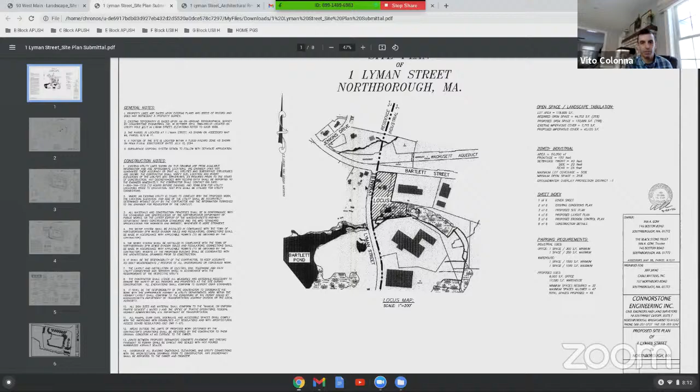Okay, so the site's 1 Lyman Street. We're on the corner of Lyman and Bartlett, right here. I'm sure most of you probably know the site, are familiar with it. Right now, there's a single-family house on it. Go down to the existing and proposed plan here. So there's an existing single-family house right in the middle of the site. This is Bartlett. There's Lyman on the side.

The overall parcel itself is 4 acres. It consists of a few separate smaller parcels, but combined it's overall 4 acres. There's a wetland over here in the back that flows down, goes under Lyman, down to the pond north of us here, or actually west of us on the screen. The site itself is in the industrial zone, and it's also within the groundwater overlay 1.

So the proposal here is for a warehouse building for Jeff's company, Cable Matters. They basically receive cables, adapters, that kind of stuff for computers and other accessories. So the building itself would contain about 12,000 square feet of warehouse area, and also 8,000 square feet of office area. And we proposed a circular driveway off of Bartlett and Lyman. The main entrance would be off of Bartlett, and this would be your main in and out.

And we have parking around the edges, kind of hidden behind the building. We have 43 parking spaces, which falls within the zoning allowances. And as you come in, you wrap around, and then for delivery trucks, there's a loading dock back in here. So those trucks would come in and pull out. And this would be an exit only on this end, essentially just for use when these are used. But the main entrance, both in and out, would be off of Bartlett.

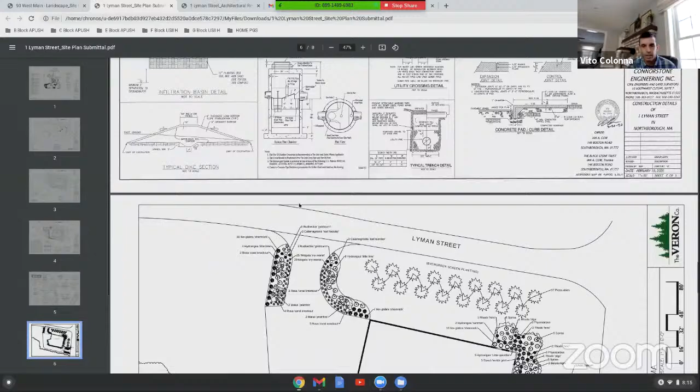We've designed the site with the septic system up front, and most of our drainage goes underground in the front here. And then we also have an infiltration basin in the back on this side. We can scroll down. That's a quick overview of the actual site layout. We'll get to the landscaping in a minute, but we also have the site lighting plan that was submitted.

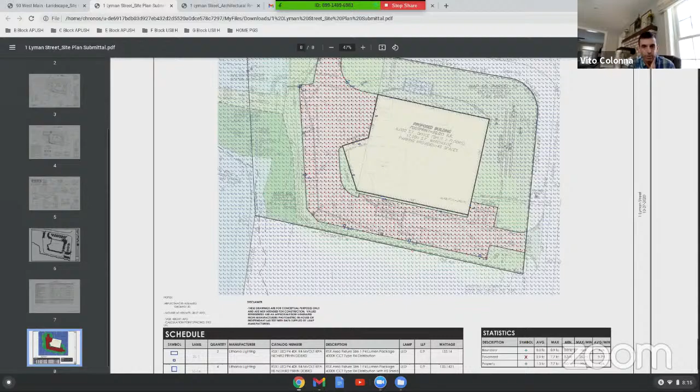This is the intensity schedule. We don't have spillover out into the roadway, except right at our aprons, which is what you're looking for, right here and right there. Other than that, it's contained within the site. It doesn't spill out on the street, causing glare for motorists driving by or abutters across the street in this area. I think they're all LED lights, about 4,000 Kelvin. And then I'll switch over, just trying to give a quick overview.

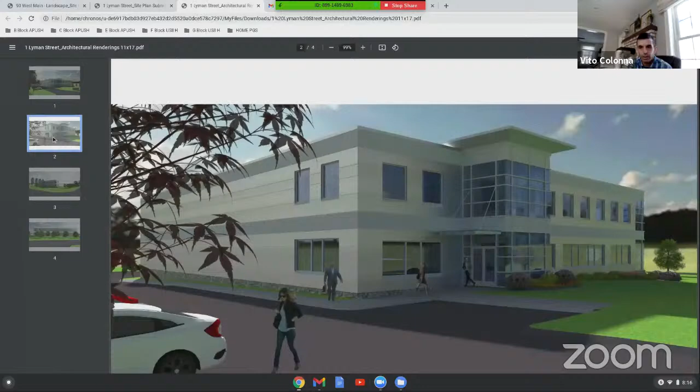And then this is what the renderings of the building look like. This is your view from Bartlett Street, looking at that main entrance coming in. We have the sign up front, parking on the side. This is what the building would look like from the front. And it's just another view from here. This is where you're standing on the corner of Bartlett and Lyman right here. So we have a nice landscape buffer on one side. It's a nice looking building from the side.

We have a lot of windows on this side. This side has fewer windows. It's kind of the side of the building. This is more your front presence out on Bartlett. And this is a view from Lyman Street itself, looking towards the side of the building. Right. And then I don't know if you want me to go through the landscaping or if Dave wants to jump on to go through the landscaping.

Yeah, so we usually break this down into 5 parts: site plan, the design of the building materials, the lighting, signage, and landscaping. So let's probably start way back up at the first rendering that you had on the site plan. We'll work through the board on this, and then if everyone's in agreement with this, we'll move on to the next one, or if there's some work you need to do. Sounds good. So to the board, he's presenting now the site plan for the building, and then we'll go through Tom and Diana and Lisa for your feedback.

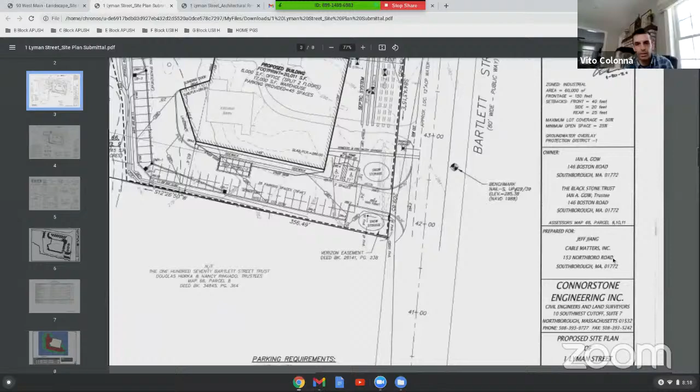So yeah, we generally do try to push them as far as we can away, and then this also gives you that nice circulation through for fire to get right around the whole building. They have basically 4 sides of access. So you have 2 front yards then? Yeah, they would classify as 2 fronts. So you're at 50, and is that 62? Yeah, I can zoom in here. Yeah, we have 62 on this side, and then about 52 on this side.

So in terms of all the dimensional requirements, this building is in conformity in terms of setbacks? Yeah, and there's a bunch of setbacks, especially on this side. The building setback is 40 feet, but then we also have a landscape buffer setback, and a zoning district setback. So we comply with all 3 of those requirements. So are you asking for any kind of waivers or variances for the site planning portion? Yeah, we did go to ZBA already for a use variance, just because it's in the area 1 groundwater overlay. It complies with the industrial zoning district, but we did need a variance from the area 1.

And how about exterior signs? I saw one on the rendering. I didn't see one on the site plan. Is there? Yeah, we should probably add that on. They had a sign down near the snow storage? Yeah, so we'll probably edit that up like you're saying. We'll probably throw that sign there, move that storage around.

So how about dumpsters or mechanical equipment? Right now, we didn't have an exterior dumpster area. We could probably find a spot. Most likely, I would put it back in here if we do need an exterior one. I'll ask Jeff and the architect whether they're going to be storing anything interior, because they do have the overhead doors and everything, or if they do want an exterior one. I'll put a note for that.

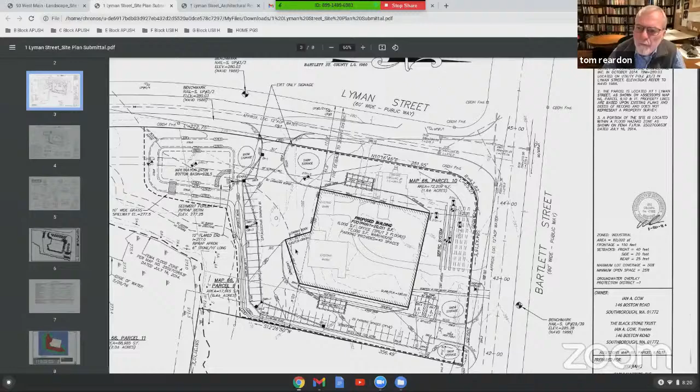So in the photometric plan for the lighting, I don't see any light fixtures on this plan. Yeah, we had left it to the lighting plan itself. We could coordinate the 2. All right. Is it mostly poles or are they on the building? They have a mixture of wall packs and poles. So they're gonna have poles around the perimeter on this side, and then also wall packs around this side.

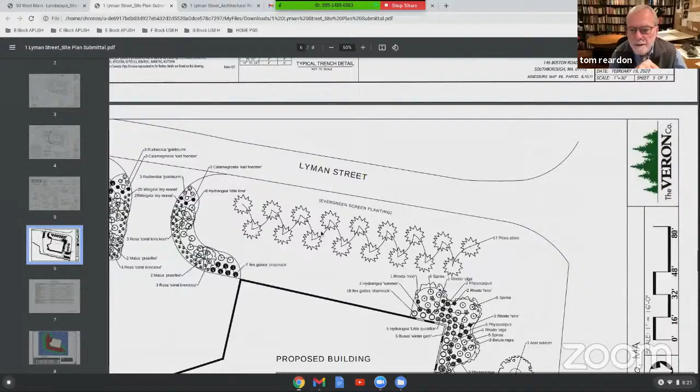So the rendering of the exterior is different from the site plan. That front entry looked like it's bumped out with the glass, but I don't see that bump out on the landscaping plan. Yeah, I do see it. We'll have to get the updated architectural. And I didn't see in the renderings the view of the loading dock area. So we're just trying to get the drawings internally consistent and fleshed out. Yep, we can get all these odds and ends addressed, that sounds good. But I certainly agree with the location of the building.

The difficulty is it's a sensitive site, being on the corner or the edge of industrial and residential. So I think we're going to need to discuss that in more detail, but I'm all set for now. Okay.

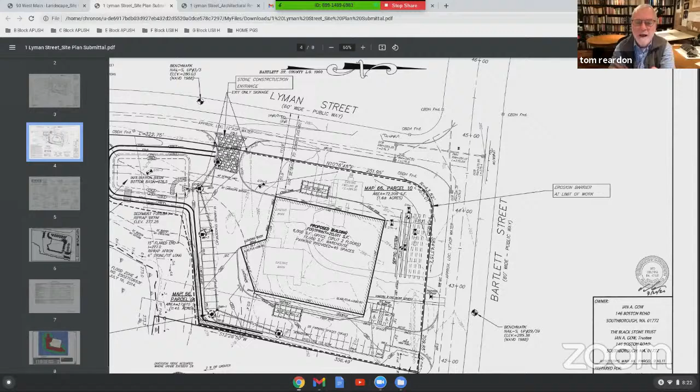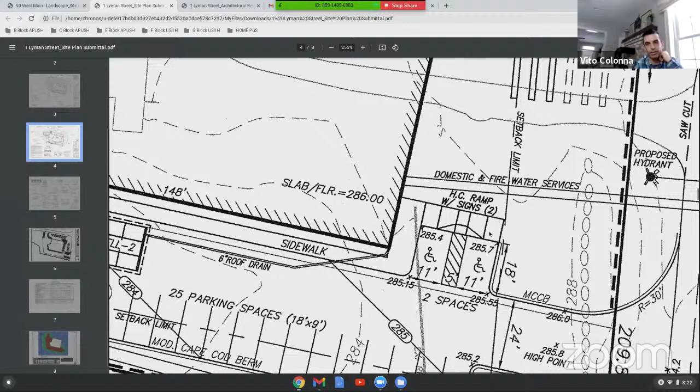So for the site, I don't have too much more to add to what Tom said. I'm a little unclear on the accessible path of travel from the accessible parking spots. Maybe that's because the entrance isn't shown on the plan. But the entrance is right here, and the handicap spaces are right in front, right there. So is there a sidewalk that will connect directly to the entrance? There's a sidewalk here. Originally, the door was right there, but now there's a bump out right here. So there'll just be a sidewalk that connects right in. Okay. I don't have any other site plan comments.

Lisa? Well, the only thing I can ask, I guess, is if the dumpster does go outside, is that not supposed to be screened with the fencing like all the other ones? Yeah, it would have. If we do put one outside, it would be screened.

And what will, I mean, it's not only sensitive with residential and commercial, but with Amazon down the street, the residents of Bartlett and Stirrup Brook and a few up there are already concerned with the amount of traffic that's going to be coming up and down that street. And Lyman Street is going to be far more used than it has before. We're going to have 1,400 employees, and I don't know how many trucks are going to be up and down there. So how do you think that's going to impact your getting in and out of your area?

Oh, how that development would impact us? Yeah. I don't see it as being a huge impact. For this operation that they have here, they don't have a huge number of deliveries in and out. I believe what Jeff had told us before, it was only a few deliveries a day, if that. Most of their distribution goes directly to consumer. You order on Amazon, it goes directly through Amazon.

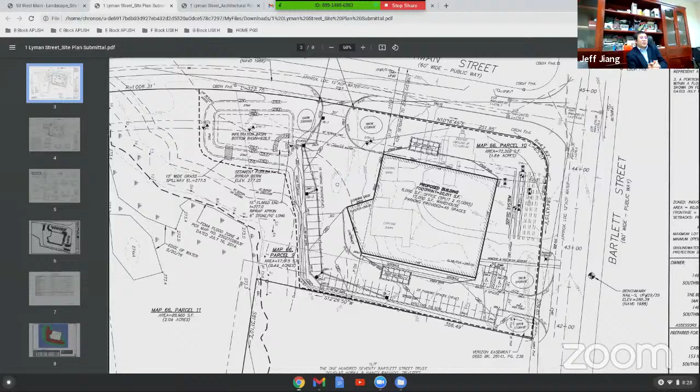We don't expect to expand the office space. The 5,000 seems to be a little big for our employee force, but we have a big testing room. Actually, it's full of computers and TVs. So we are in the business of connectivity products. It covers the whole computer, consumer electronics, and communication. So yeah, it will be a big test room on the first floor. The second floor will be mainly the office space.

So it almost is like you have a multifunctional building, where you have office space with employees there, you have like a lab that you'll be using, and then you've got your warehouse for your distribution. So it's 3 components of that building, correct? Yeah, you can say so. Yeah. Okay.

The lab is unlike those pharmaceutical labs. It's all dry. It's just the testing, the function of the cables. Yeah, I'm thinking of what you were describing as a technology lab where you have PCs or other forms of video, whatever connectivity you're describing, not a lab for testing drugs or manufacturing or anything like that.

I completely understand that. So can I ask a question about that? Sure. Jeff, the testing room, is this a higher standard, like a clean room? It doesn't need a clean room. It's just a normal office building, with a bunch of TVs mounted on the wall, some surrounding desks to place the computers, the pads, and in some cases we test even phones. So we make cables to make connectivity possible. So you can say it's just a normal office for testing.

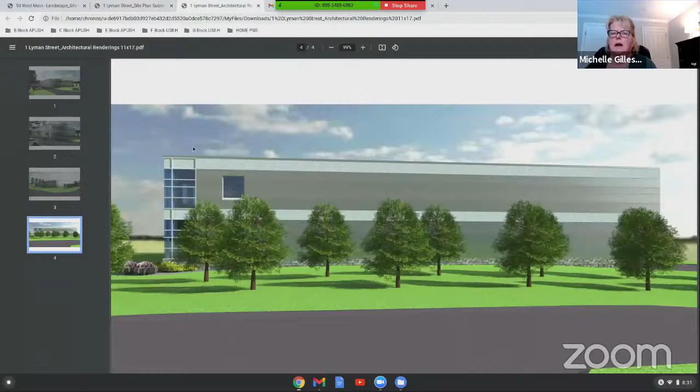Can we look at that now? Does the board agree that they like the design, or does the board agree they need to go back and blend it better with the residential area that's over there? Can we sort of get a consensus on that? I think that will help the applicant move forward on his design for the exterior of the building.

Well, I would say because it's on the edge of both industrial and residential, and this is a highly trafficked intersection, the shock of this building in the midst of a residential area is going to be hard for the community to take. And the nature of the office building design doesn't offer many overtures towards the residential context. This building would look fine any place else in the industrial zone, but you've got to remember where it's located. This could be next to anybody's house because of the unique juxtaposition of the industrial and residential zone.

So in spite of the quality of the rendering, I think the scale and the flat roof, ribbon window style architecture is diametrically opposed to all the surrounding residential areas. So I think that's an issue that needs to be discussed. Okay. So I do agree that you have to acknowledge the site location between these two districts. For me, it's less about the architectural style and more about the scale of the building. I think there are a number of ways that could address that.

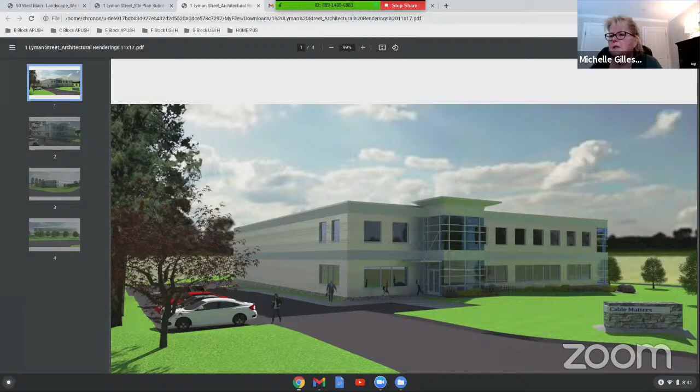If we can just, for time's sake, let Dave Veron come back in, explain his landscape plan, and then we'll wrap you up at 8:45 so we can move on to the next applicant. But do you feel, Vito and Jeff, that this is significant enough information for you to go and make some changes, and then come back and talk to us at our next meeting? I mean, from the site plan end, yeah, I think it's fairly straightforward, basically just coordinating those couple items. Okay. More from the architecture, and I'm not sure if they have enough to go on. I don't know if you have got enough feedback on what you need?

I think so, but what I find really difficult is that, oftentimes when we're looking at an aesthetic, it's like I.M. Pei at the Louvre. You're designing a new museum in an old setting, and you say, I'm going to be true to the time and go with something that is modern and doesn't try to be something it's not. That is the part that I may struggle with.

So any examples that you can float my way of buildings that manage to do both, and yet not completely have the client stuck with an aesthetic that doesn't quite sum up what he is all about and what his company is all about. Because at the end of the day, this does reflect his interests too, and becomes a flagship for his company. And so those would be my concerns: in trying to sometimes satisfy everybody, you satisfy nobody. So we will work on any ideas that are brought our way.

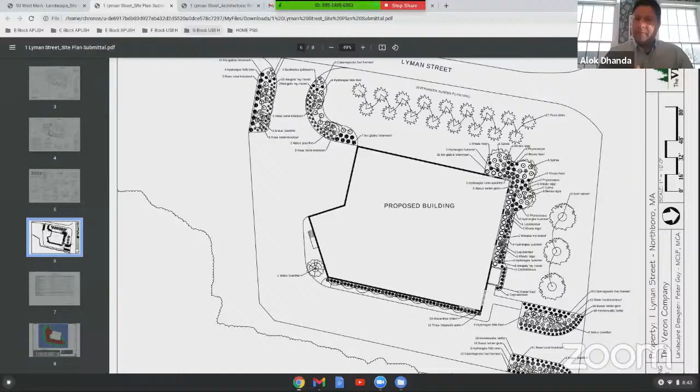Yeah, I think you said it well, and I think, from Tom, Lisa, Diana, myself, and Dave, as well as staff, if we can find some examples that exist and work well in the community now, we should send that on to you so that you can see visually where we're coming from. So I agree with you on that. So thank you for making that attempt for us. I appreciate it. Okay. And so let's go on with Dave.

Are you still there? I'm here. Okay, so if you could just explain the landscape plan, and if there's any feedback on that, they can give that, and then we'll wrap up and move on to the next applicant. Sure. Basically, I knew this is a very tough spot. This is, I think, the second or third time I've designed this for different people going through. So whatever was going here, I knew was always difficult. So what I ended up doing was basically trying to hide the structure no matter what it is.

So along Lyman Street, I put an evergreen screen in, which will actually go to 30 plus feet high, spaced out. So over time, you're not going to see the building. No one will. On the corner between Lyman and, got the name, Bartlett there.

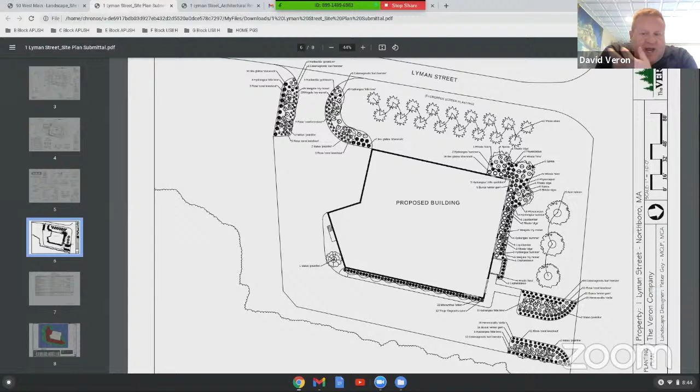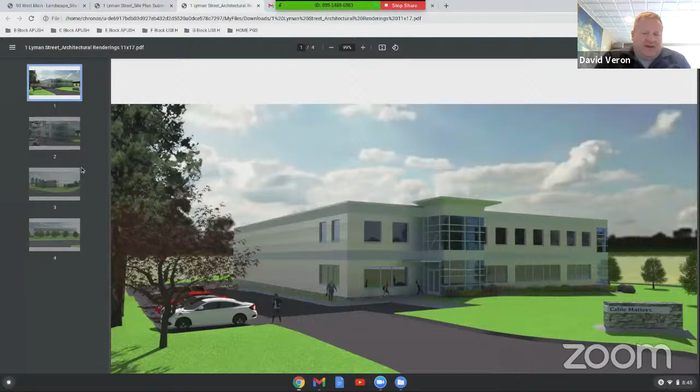I did a very creative planting in the corner of the building. It's actually year round. We'll give different color variations, and I put 3 Betula nigra, which is a birch, which has a really interesting structure as far as the bark and the actual tree itself. Which, if you go back to the 3D diagram that was there, you don't have those in there. And obviously, it would take away from this shot right here.

That would really soften the architecture there, because basically you got a big box. So we're trying to soften the architecture. And even in that box diagram, if you go to maturity, you're not going to see most of this box. It's going to be pretty well hidden. But you're also going to have a lot of color going on and a lot of interesting features happening. And that's the design of this landscape here.

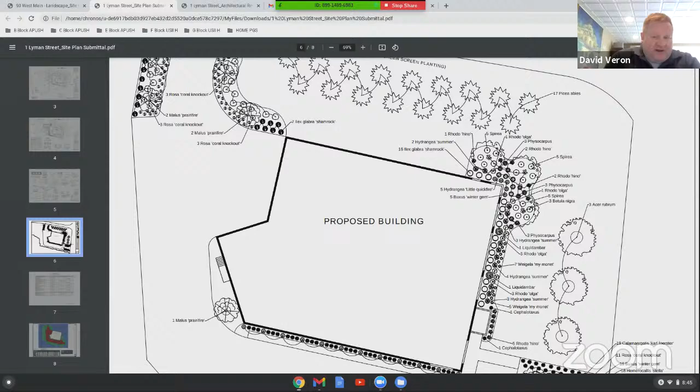And that evergreen wall will come in, if you take a look at this diagram that we're looking at right here, it's going to come much further in on the Lyman Street side, on both ends of it, and into even the driveway here. Again, I just really went overboard as far as giving as much of a home feel as I could to a commercial structure. You're not going to find many commercial areas having this much landscape into them. But again, I was trying to appease everybody as far as this property goes, because I knew how touchy this is.

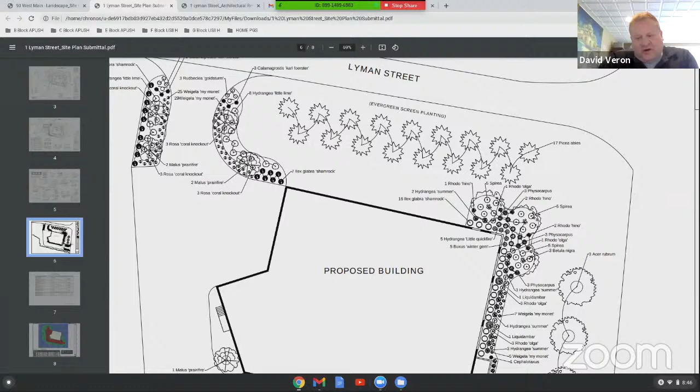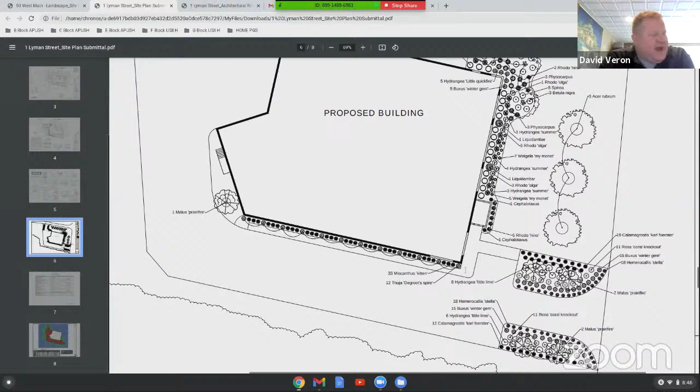Again, going along Bartlett, did the same thing as far as just kind of really making it feel home-like. And again, same thing with the entrance there. Even along the entrance to the building here, again, rectilinear building, not a lot of space along the walkway there, but again, trying to make it very interesting, aesthetically pleasing, softening the architecture as much as we could, and doing what we could within the space that we had. So that's the general design in the 2-minute time frame that we have.

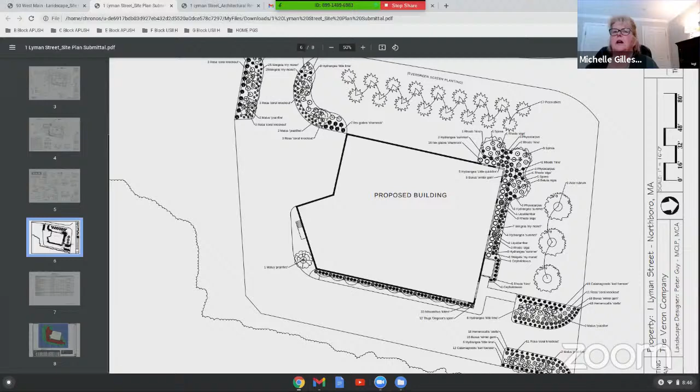Can we update the renderings to show that? To show those? Yeah. I think that would go a long way in how we approach the building. So for the next time, can we have the landscape plan updated with the renderings? Because it'll show what Dave was alluding to, that by using the landscape to soften the building, we may come back with the feedback from the board members on how to approach the building. Yeah, both the right and the left would get really encroached, and then even those windows, you're not going to see them. Yeah, it's all going to get packed in.

Yeah, Dave and I can work on that. I have a limited selection of trees and landscapes that work with my software. So I will work with Dave to see what we can do to merge some of the information he has into my rendering software. And even if we go to the 30 to 40 foot mature height, those guys on the right-hand side, you're at 15 foot of floor, you're over the top of that building. You'll be up here, and they extend a little further up here. Exactly. And even on the left-hand side, the building height that you're looking at now is approximately 28 feet. So you're about 14 feet over that building height. So the trees that are shown are probably the size.

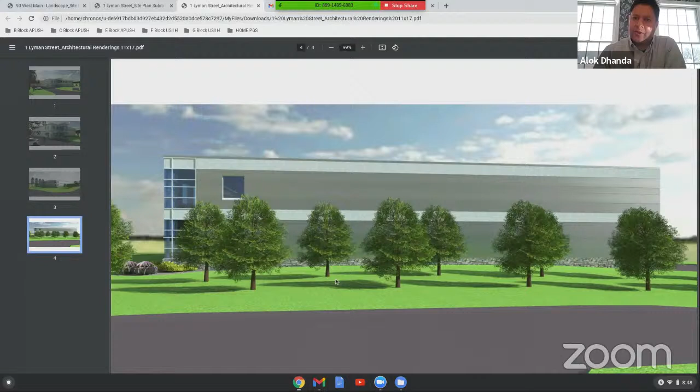What size trees do you think you'd be planting, Dave? We can go for anything that he picks. Usually I like to plant in the 8 to 10 foot range, but we can do anything. It's up to the budget. I don't really like planting too huge. It's the best chance of surviving when replanted. Right. 8 to 10 foot is what we went with in the rendering. And so we were showing day one what it would look like. Exactly. We could try to come up with a rendering that shows, whatever, 5 years from now, what it may look like. That's kind of like new planting right there.

Everything right in here. We don't have the birch trees against the corner. You're kind of showing day one minus, like this planting in the corner would be much bigger. Okay. You're missing trees on the left. I understand you want to show the building here, but you really want to show it 5 years in, and you're not going to see much of this building.

I was going to suggest that maybe the architect and landscape designer collaborate to enhance the building rather than Dave's trying to hide Alok's work. It seems like you're at cross purposes. Like you have a corner feature of the building with glass, which is something you want to draw the eye to. I wouldn't put tall trees to block the architectural feature. So I'm suggesting you guys collaborate to have the landscaping enhance the building rather than block the building.

Yeah. What do you think, Alok? Well, I mean, Tom, I hate to put in all this effort to only have it blocked, but on the other hand, you're looking at a big, gigantic warehouse building. There are not that many that we point to in architectural magazines outside of what you end up doing at Neiman Marcus and in big retail storefronts, but we don't have the luxury here to put signage and curves; this is a utilitarian building. I think as utilitarian buildings go, it's smart, it's clean, it's using materials that don't require constant upkeep and painting, a lot of maintenance and things of that nature.

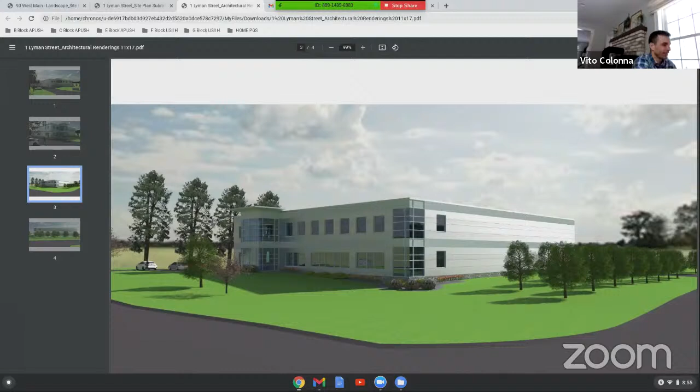So, look, you don't have to do another polished rendering. If you took this view, say, and sketched up some possible ways of addressing the massing without devoting a lot of time to recreating a full-blown rendering. I mean, we can work with you on that. Okay, Tom. All right. Or just actual elevations will also help as well.

What do you want, Lucy? Okay. Hey, what's up? All right, what?

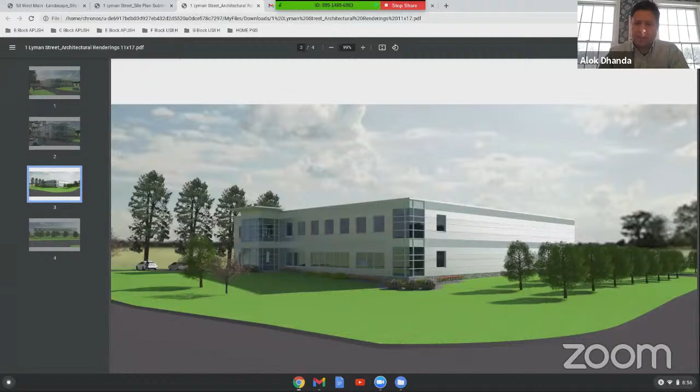Okay. So Jim, if we could take the Lyman Street applicants out of the meeting and then bring in the West Main Street applicants. Okay, I'm gonna stay. Don't take me out. I recuse myself. Okay, so Tom, you're going to be presenting at the meeting, so you'll just turn off your video and your sound until we're ready to have you call in, or you're going to start presenting all the way through, right? That's what you're going to do?

Yeah, I'd like to hear Vito's landscape layout. Okay, so Vito, you're part of this applicant as well? Yes. Okay, good. And we have Raquel and Mark, welcome. Can you hear us? Yeah, thank you. Okay, so we made a lot of progress at the last meeting. We're gonna come back and we can either start with Tom or Vito. But let's go down the list that we talked about with our site plan, the design review, the lighting, signage, and landscaping. So I'm not sure who wants to start first.

I can start that way. I think most of it was related to landscaping anyway. But we did update the site plan. And this is actually the landscape sheet that I'm sharing now. One of the items that were asked to be added was the abutting buildings. So these are the two abutting buildings, just to show the proximity to the street and how this building kind of comes right in line with these two. It kind of matches the adjacent areas. So we did add those on there.

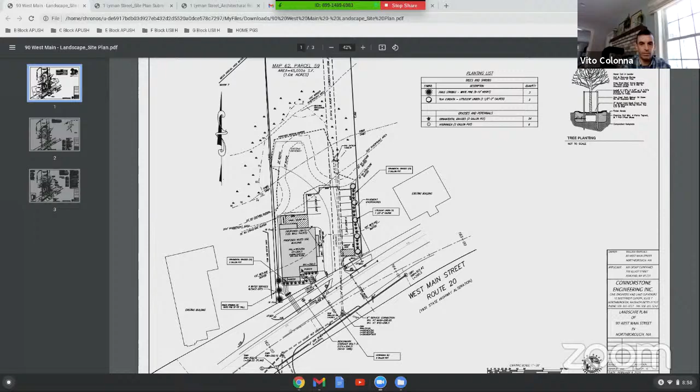And then the rest of the site plan, essentially, we didn't really have to update much. Our updates came more in the shape of the landscaping plan. We added in the limits of the mulch beds. And then also we revised this side. This is kind of what was discussed last time, having some deciduous trees with some intermittent ornamental grasses that could take the snow plowing over them. Since this is an area between two parking areas, it's a tough area to plant up. So we took those recommendations and edited that area.

We just proposed the lindens because they're typically a fairly hardy tree and can take a lot of different conditions. And then the ornamental grasses can get plowed over in the wintertime and don't get hurt like an evergreen would. Those were the only changes that we really needed to make on the site plans and landscaping. So I'm going to go through that before we move on.

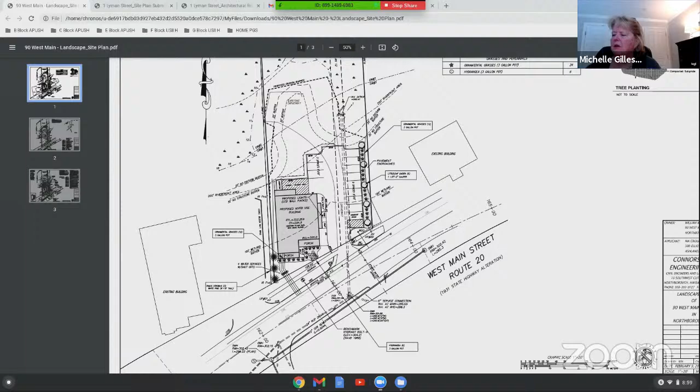Okay, so we'll go around again. Dave, you're our landscape architect on the board, as well as Diana and Tom and Lisa. Feedback on landscaping, because this was probably the primary thing that was outstanding from the last meeting. Looks good to me. I think the updates were incorporated effectively, yeah. Okay. Tom, Lisa, either one. I've recused myself, Tom, remember? Oh, that's right, sorry about that. My problem.

There's a notation of 1.5 caliper on those new trees. What actually is that size? I tried to look it up to find some sort of reference. It's an inch and a half. 1.5 inches of what? Is that the base of the tree? Yeah, it's the thickness of the trunk. The trunk of the tree. So those are pretty tiny when you're putting them in, right? Not really. That's a decent size for that space.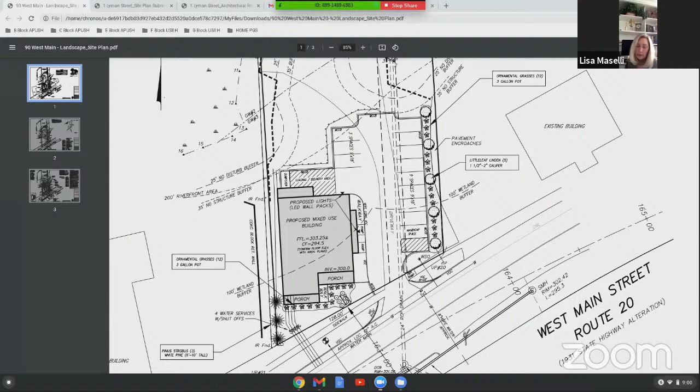So how tall would it actually be? Depending on the lindens, probably 8 to 10 foot, I would assume. Okay. Because I noticed that they're nice and full. They come out in a nice full fashion. And those are deciduous, I would imagine. That's right. All right, and there was a correction to be made on the plan that didn't get made, where it should be listed as a 1-2 bedroom. Yeah, I know. Tom noted that after I sent these in. We changed it on the plans that are going to go into ZBA. It doesn't affect our parking count though.

All right, and then the roof material. I watched the meeting again last night, and there were a lot of things I had questions on, but what's the roof material going to be? Before we go on, I just want to make sure we can check off everything. So everyone's in agreement with the landscape design for this building? Yeah. Okay, Lisa, you want to move on to design of the building materials? Yes. The roof is a major part of this building. Are you doing architectural shingles? Are you doing metal? What are you doing for roof materials?

In my description that I gave to Kathy, I described it as asphalt fiberglass roof shingles, architectural style, in black or dark gray. All right, I prefer the dark gray. I think the black is so dramatic on such a long area. All right, so what's the roof height? There's nothing on these plans with any numbers. I don't see a roof height. I don't see a building dimension, a footprint, the room sizes. There's nothing there for me to reference.

Well, this is a preliminary presentation. I can provide you any kind of dimension drawings. The floor plans submitted are at 1/4 scale. The elevations are all at 1/8 scale, so they're easily verified. The roof height for this proposed building is 31 feet, which is average grade to average roof line. The ridge is 40 feet. And the allowable height in downtown business is 45 feet. So we're about 66% of the allowable height with this building. So you're saying the ridge is 40? The ridge is 40. All right.

Well, I think the comments on the previous building related more to the fact that they did not follow the design guidelines. The entry was not facing the road, it was facing the parking lot. The front elevation was not detailed, and we had a 40-foot high gable of vinyl directly on the road. The roof was not articulated, it wasn't broken up. We had a dangerous condition where people were backing out of the garage directly into the entryway. So the primary concern was they were not following the design guidelines.

All right, well, and to that point, I don't think that this building is, when it's coming in with a contemporary look. I mean, the design guidelines were proposed to be colonial in nature. So this comes in and it pays more homage to 7 Monument Place and Bank of America than it does to the other products that are in that area. Do we actually have a directive to be colonial style in Northborough? Really? Yeah. That's what the design review guidelines say. Give me chapter and verse, please.

Yeah, I'll look it up and send it over to you, because for three people who were on the master plan, it's interesting to see this nice modernistic building come in to an area where people throw their hands up at 7 Monument Place. They throw their hands up at Hillside Grill. They throw their hands up at 109 West being against the back of the property with five different fences.

Lisa, these comments aren't true, okay? It's not true about Hillside Grill, okay? There have been a lot of other buildings that don't look colonial that have been approved as they go along. I think this is a huge change from the last applicant who put the building in there, right? I think there's been a lot of detail, and I think in the end, it'll look really good. So I don't think those comments that you're making are true, especially on the hillside.

That is not true. So let's just try, and these are two architects who, yes, sat on the master plan, who know what they're doing and helped write the design guidelines. And nothing in the design guidelines says that every building in Northborough has to look colonial. And this is not a modern building. I design modern buildings, and it's modern in the time that it's built, but Tom has been very careful to acknowledge specific historical styles and to make sure that the individual elements of each elevation retain the same style. And he explained that in the last presentation.

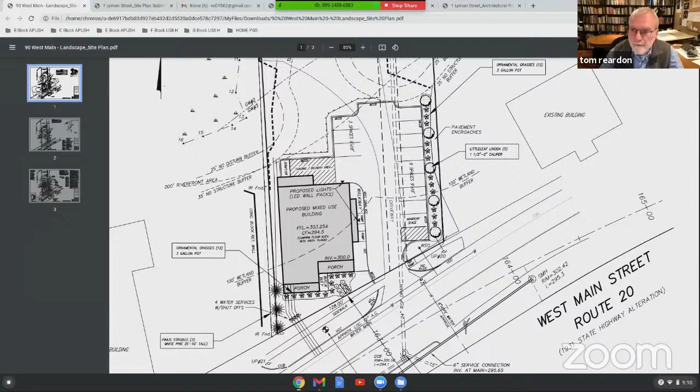Did I address the issue of scale and height here? 96 West Main Street is 8,130 square feet. And its mid-roof or allowable roof height is 26 and its ridge is 32. 82 on the right side is 6,000 square feet. Its mid-roof height is 31 and its ridge is 37.

The footprints of the 2 flanking buildings are larger than what I'm proposing here, which you can see on the 2 site plans. So in terms of the scale of the footprint, the middle building at 90 is smaller. The ridge line, or the allowable roof height of the building I'm proposing at 90, is identical to the building on the right. The one on the left is a little bit lower, but it's a bigger first floor, smaller footprint. So in terms of scale in area and scale of height, it's proportional to the surrounding buildings.

In terms of its architectural style, I'm using the same vocabulary that the flanking buildings and most of the buildings along Main Street are. It's a modern contemporary interpretation of those vocabularies, but I certainly think it's very compatible with the architecture we have on Main Street. What's the square footage of this? It's 7,632 square feet, which is less than 96 West Main, which is the building to the left, and a little bit more than the one to the right.

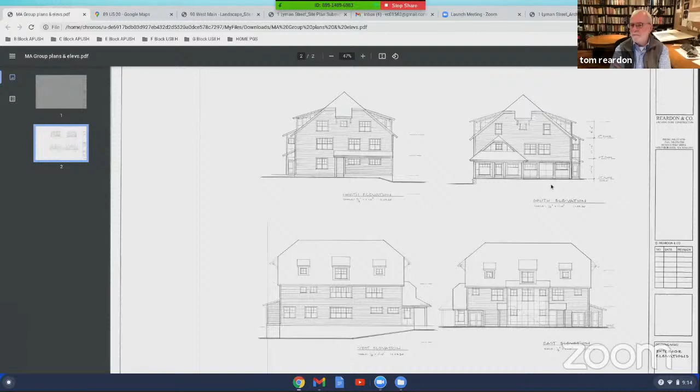I don't think we had any questions about the signage. The applicant was having a signage on the exterior. Was there going to be any signage on the building at all? Potentially, but at this point, they're going to rely on the ground sign for identification. Okay. And then after that, they'll follow the sign bylaw.

Exactly. And then with regards to the lighting, I think we were all in agreement with the lighting. There were no questions from the last meeting on the lighting. Well, we haven't been able to get the photometric plan completed, so that'll have to be submitted later. Okay.

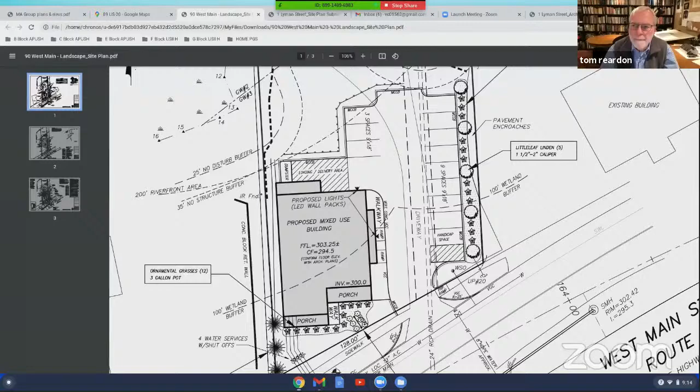All right. So let's go around through each so we can help this applicant move forward, because I know that... what is your time frame as far as getting forward to the next permitting board? Are you looking for the month of February, or the month of March? We should be ready to submit probably next week; this application could go in.

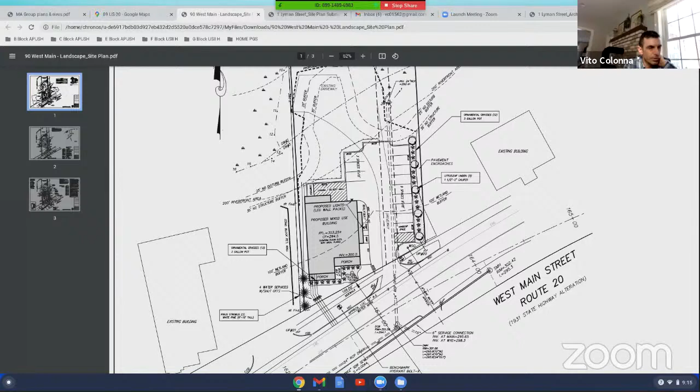Okay. I don't think that's enough time to be the February meetings, so it'd probably be the March. Yeah, it is. You'd have to have 30 days to get in. So you would like to get your application in next week for the March meeting. Is that correct? Yes. Okay.

And if someone can remind me, are we meeting with Judy Barrett next week as well? Yes. Okay, and that date is the 18th or the 19th? 18th. And Bob, if you could help us, when would their application need to be in for the March ZBA meeting? Hold on a second, I'll look it up.

Okay. So if I understand, what is missing from these designs is your photometric plan? Correct. And when would you be able to get that done by? Well, I was told it was in the works, but it wasn't going to be available for today. It certainly will be in before the next time you meet.

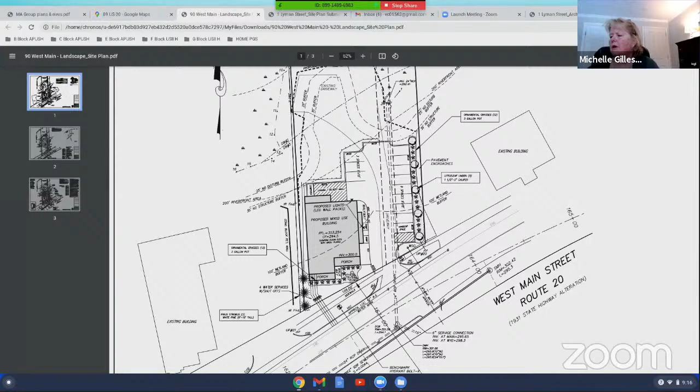Okay. All right, so if we go down through our checklist, we're all in approval and agreement with the landscape. We're all in approval and agreement with the signage. We're all in approval and agreement with the lighting, as long as the photometrics plan is in compliance with the design review standards. It seems we're all in approval with the site plan, but it's the design of the building that we seem to have not a majority rule on.

So having said that, is there anything else that I'm missing or that the applicant is missing to be able to move forward with their application for the next permitting board? Kathy, I think you meant unanimous approval instead of majority approval, because we do have majority. Yes. Thank you. Sorry about that. So I don't think there's anything else missing on this.

Bob, is there anything you know is missing that you can help the applicant with so they can get their application in full compliance with the permitting board? I can't really think of anything. In terms of the schedule of the next ZBA meeting, I thought I had that paper. I'm working from home, and it's on the computer I can't reach remotely at this moment. So I don't have the exact dates. I can get those to you as soon as we get off.

In terms of other things, I need to see a floor plan of the second and third floor apartment layouts. I sent those to Kathy, so she has them. I can email them to you, Bob. That would be great. I can send you the code review as well. Yeah, send me everything you have. I'll take a look at it, and I'll send out any comments I have that are going to affect the boards.